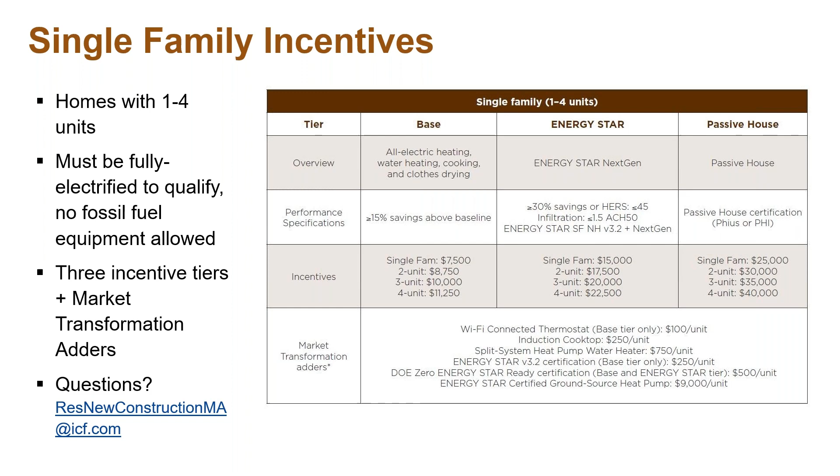Please note that the program defines low-rise buildings as having 3 stories or less, while high-rise buildings have 4 stories or more, or any multifamily building with centrally metered utilities for tenants.

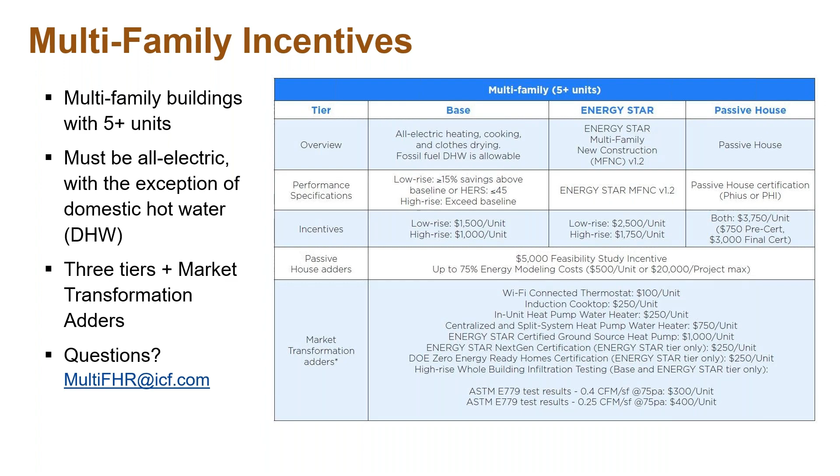Diving right into today's great presenters. First, we have Megan McDonough. She has been the Executive Director of Pioneer Valley Habitat for Humanity since 2014. Megan has been working with Habitat to refine the model of small ecological homeownership, asking the question, what's big enough to contain the dream of homeownership? Prior to her work with Habitat, Megan spent 7 years at the Center for Ecotechnology, providing support for green building certification programs like LEED for Homes and Energy Star Homes. She has a master's degree in regional planning from UMass Amherst.

Next, we have Walt Kohler. Walt is a volunteer who has been building homes with Pioneer Valley Habitat for Humanity for 17 years. He got involved with Pioneer Valley Habitat on the construction site when he retired from the tech industry and has helped to build more than 20 homes. Over the years, he has increased his depth of knowledge in building knowledge and applied his project management skills as a volunteer build team leader, doing planning and project management for Pioneer Valley Habitat construction projects.

Last but not least, we have Jamie Callan. He is the owner of Riverbend Design LLC, and he is a certified HERS rater since 2013. Jamie's background as a carpenter and general contractor led him into the building performance field and sparked an interest in high performance homes. Through many years of participation on building projects as a contractor, rater, and consultant, Jamie has developed a focus on making high performance building practical for all tradespeople with commonly available materials.

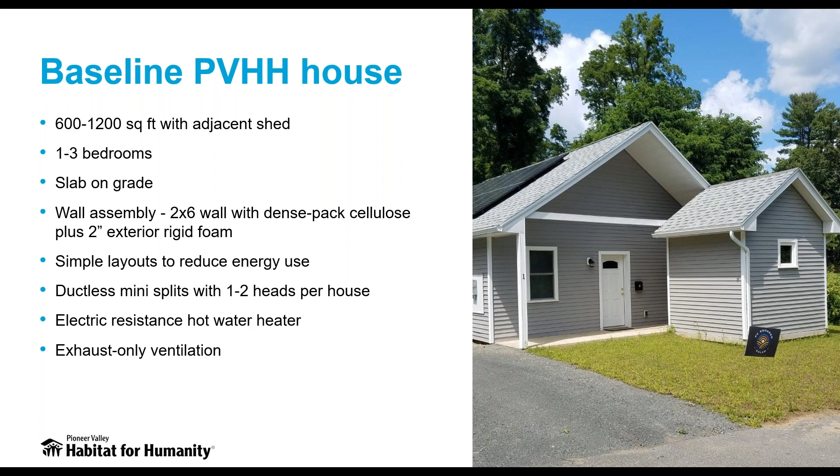So if you go to the next slide, when we decided to try and get to this level 2 incentive, that $25,000 for a single family house for going all electric, some of the general requirements we were already aligned with. We were already doing mostly all electric homes. We don't have natural gas availability in Western Mass, so all electric makes a lot of sense.

But some of the challenges we have faced are around the overall building air tightness, getting our ACH 50 number on the blower door test down to less than 1 is definitely a challenge. And we also have to get the overall HERS rating for the house to be less than 35 without the addition of PV. So that means looking at the overall efficiency of the house as a system.

That meant us going to heat pump water heaters. It was really a necessary step for us to get that overall efficiency of the house. But since we're building slab on grade houses, finding a location for that heat pump water heater is a little bit more difficult. Typically, you throw it in a basement, no problem, but we didn't have a basement in these houses.

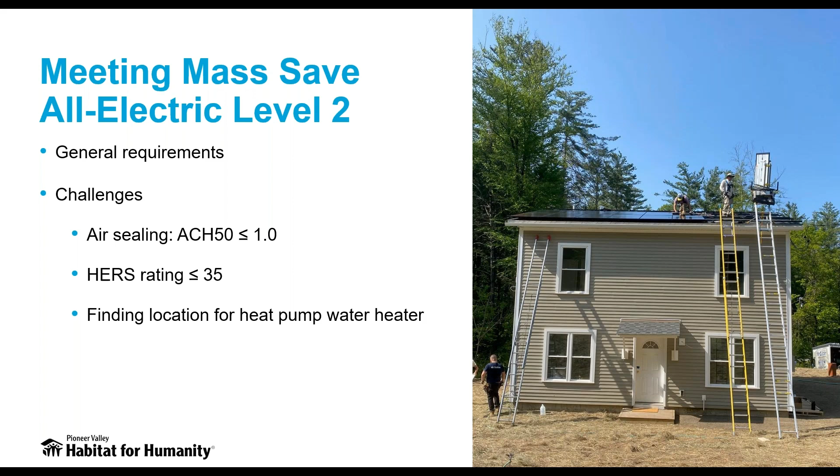Next slide. This is a little bit of a history of houses we've been building in the last few years. And you can see the rows in green, these houses are ranging from 600 and something square feet to about 1,400 square feet. Our HERS ratings without PV, I think were pretty impressive, 51 at the highest and down to 34.

With PV added, we got as low as a -19. And these are some great numbers, but trying to get to that HERS 35, you can see we only did it on a couple of these houses.

And the one highlighted in blue is the house we're going to talk about the most today, this house we built in Conway. We were able to hit that overall HERS target, as well as the ACH 50, which is that measure of building air tightness that they do with the blower door. We got that one down to a 0.95 when the program for level 2 requires a 1 ACH 50 or lower for that highest incentive.

And we didn't quite make it with our other houses. We were trying in 2023 with those 3 houses we did in Northampton to make the incentive. We did make it to the $15,000 level 1 incentive with one of the homes that got under a 1.5 ACH 50, but we didn't quite get there with the others.

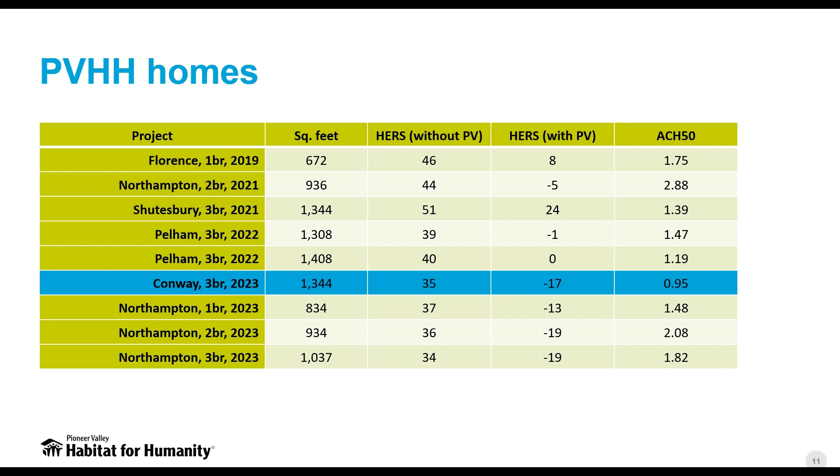Next slide. So I think I'm going to turn it over now to you, Walt, here to talk a little bit about the house we built in Conway and where we went from here.

Okay, thank you, Megan. So the house shown on the right in a rendering is a 2-story, 3-bedroom, 1.5 bath house, slab on grade. Our goals were energy efficiency, healthy indoor environment, low maintenance, and simple to build. As Pioneer Valley Habitat, we do most of the building with volunteers, some of whom are skilled, some of whom are not too skilled, but learning skills. And of course, we have to engage with professionals for the site work, for the foundations, for the plumbing and things like that.

But most of it is done, most of the real building and the challenges to get to the ACH 50 under one are up to the volunteers. The next slide, please.

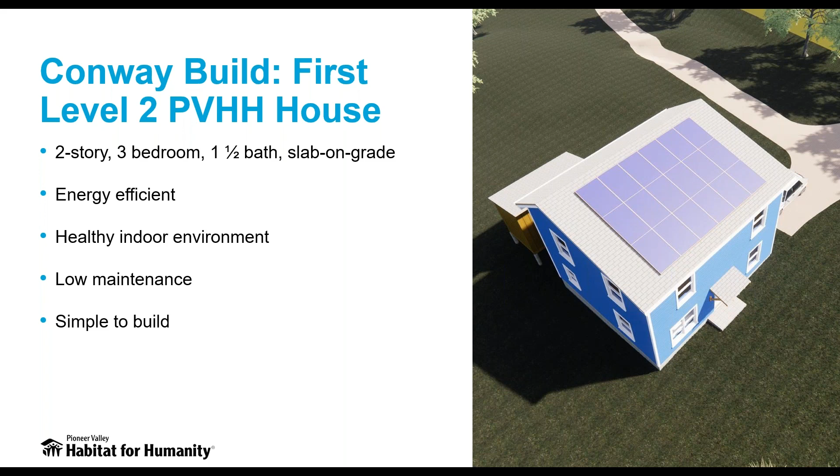So here I say are the keys to reaching level 2. It's the insulation, and so as Megan said, we've been building 2x6 walls with exterior insulation or dense packed cellulose on the interior and 2 inches of XPS on the exterior. This shows a picture on the right of our house with the rigid foam on the exterior and zip taped the joints and zip taped around the windows. That's basically our vapor barrier, for the water and vapor.

Air sealing is critical to get to level 2, and I'm going to go into some detail on that. To reach level 2, we had to have an efficient heat pump hot water heater, efficient mini split for cooling. We found that in order to reach the air sealing requirement, it was very critical to do a pre-insulation blower door test analysis so we could figure out what additional things were needed to get under 1. We required balanced ventilation. We did this on this particular house. Without PV, we got down to 35, and with PV down to -17, and our ACH 50 came down to 0.95.

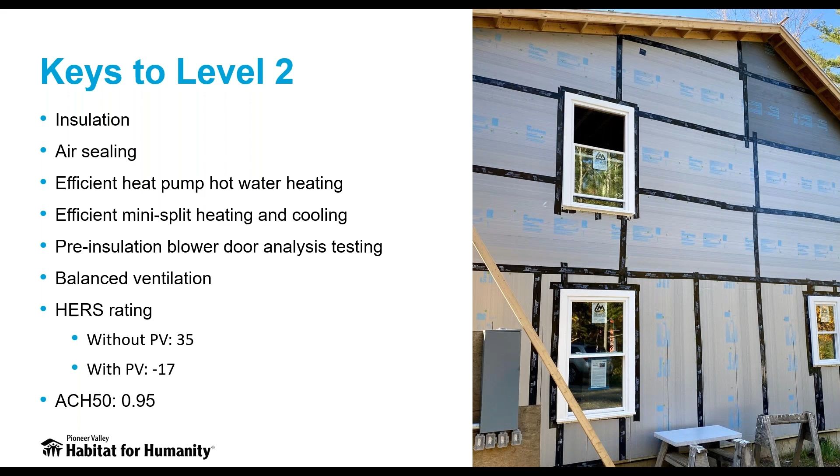We're going to go into a little more detail about the air sealing components. Again, it's a slab on grade. We use 6 mil poly under the slab for the vapor barrier. We build 2x6 walls with a PT base plate, and we sealed and caulked the PT to the base plate. We have OSB sheathing on the house, not zip sheathing - this was a little less expensive. We caulk all the OSB sheathing joints to the framing. As a backup, we also zip tape the OSB sheathing seams, and we zip tape the sheathing around the windows and the door rough openings.

When we put the windows in, we foam seal the windows and doors to the rough openings. The picture on the right shows a volunteer doing the foam air sealing of the windows to the openings. The joint for the air sealing is the sheathing.

The ceiling wall of our 2nd-story house - the ceiling is the air barrier. So we put a plywood wall cap on the top plate, and then we caulk the ceiling drywall to that cap. I'll show you in more detail in the next slide. We do a lot of caulking, a lot of air sealing.

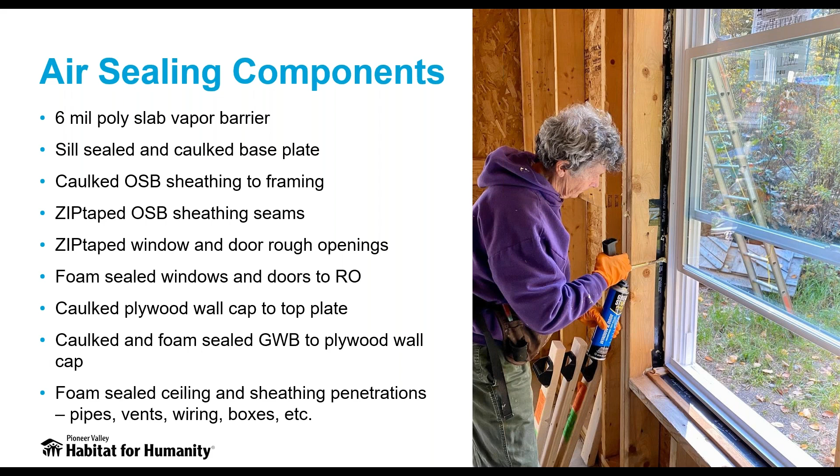Here is a wall section of the bottom of the house. At the very bottom, you see the foundation where we put 2 inches of EPS foam down below, and on top of that foam, we put a vapor barrier, and then the slab goes on top of the vapor barrier. That vapor barrier extends out beyond the foundation, out of the wall. On top of that vapor barrier, we put foam seal and caulk, and then put a PT base plate down on top of that to make that air seal. The yellow line going up shows the sheathing, and that's the air barrier to the house - that sheathing is the air barrier. At all points where we interface with the framing, we put a row of caulk there.

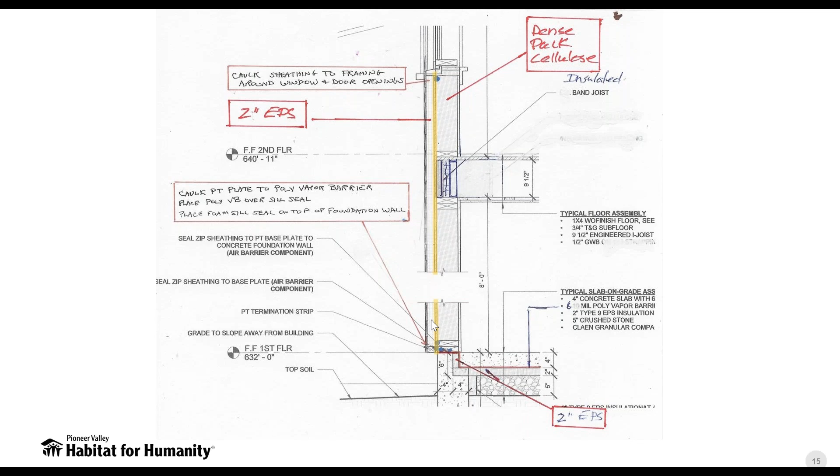The insulation in the house, as I said earlier, we have dense packed cellulose on the interior and 2 inches of EPS on the exterior. We get an R value of 30 doing it that way. Let's go to the next slide.

The next slide shows what happens at the top of the house, where we have to transition from the exterior sheathing as the air barrier to our ceiling drywall as the air barrier. All the little blue dots show where we apply caulk in order to seal the sheathing to the framing, and also to seal the interior drywall to this plywood top plate that we put on top of the two framing top plates.

So we use a lot of redundancy in terms of how to seal things up. We find the redundancy is important because we don't have professionals doing all of the work. We have volunteers, and sometimes they're very sensitive in terms of applying things, and sometimes they're not quite as good as we'd like, so we end up having to do redundancy. In addition to the caulk, after we did a blower door test, we found air leakage at the joint between the top drywall and that plywood top plate coming out of the wall. So we went around and put a row of expanding foam at that joint. Again, we use belts and suspenders here often in order to get the final result we're looking for.

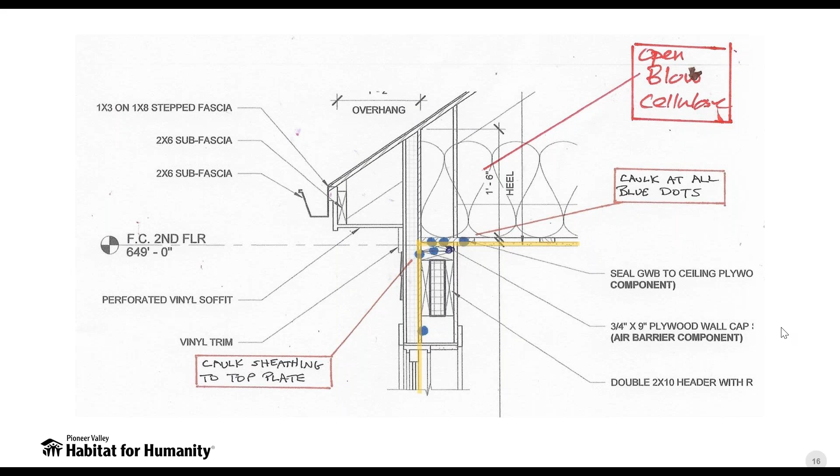In terms of energy efficiency and air quality, we've used the Broan ERV system to take out stale air and bring in fresh air. We take stale air out of the bathrooms, and one of the pictures on the lower left shows the unit in one of the bathrooms. The other picture of the exterior of the house shows the exterior intake and exhaust we use for that system.

Finding a place to actually put this ERV system is also a challenge in a small house, and we've placed it over the stairway going up the stairs. We'll show a picture of the layout in one of the next slides.

On the right-hand side, it shows the Mitsubishi mini splits, one of the heads that we have, and the double units on the outside. We have one Mitsubishi unit head downstairs and one upstairs.

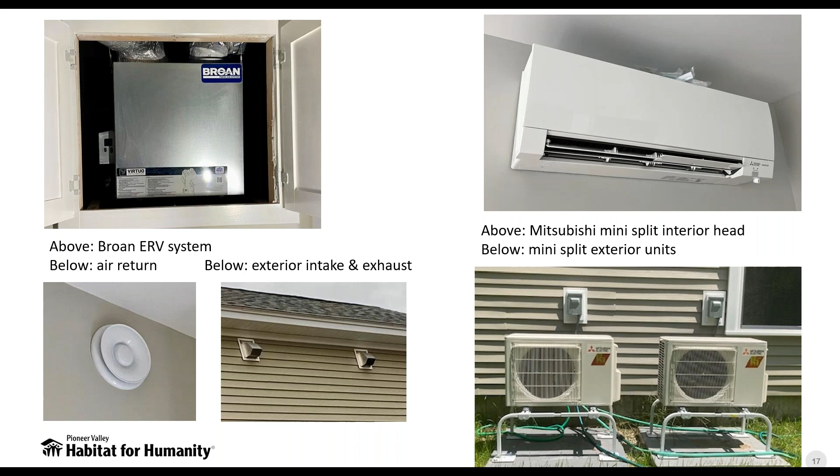As Megan was saying earlier, finding a place for the heat pump hot water heater was a challenge. This shows the heat pump hot water heater located inside a closet under the stairway. This is a Rheem heat pump hot water heater, I think it's got an efficiency of 3.8.

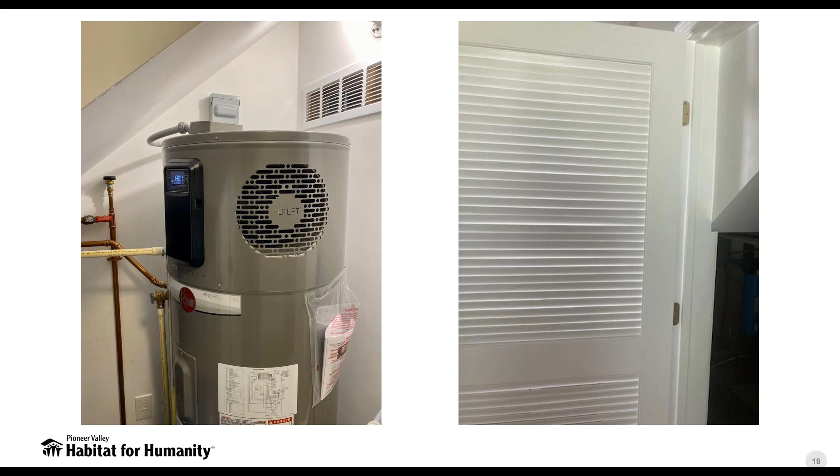The challenge is to get air into it, so you see we have a louver door on the right. We also have some louvers that go into the adjacent closet. Why don't we go to the next slide?

Here's a basic layout of the house, 24 by 28, this is the first floor. We have an accessible laundry and bath unit, and then you see the stairway, with the little yellow mark showing the DHW, where we put the hot water heater. The door labeled D2 is actually the louver door, where we get air to come in and exhaust into the adjacent entryway.

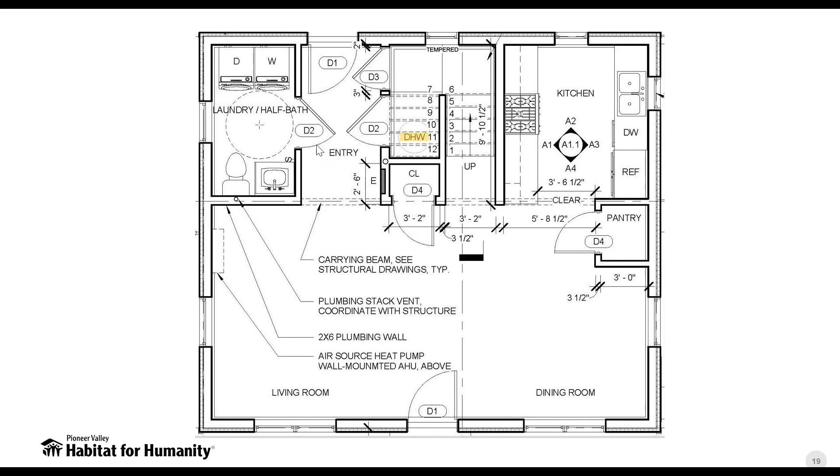On the left-hand side of the house, there's a marker that says the air source heat pump wall-mounted unit above. That's where we put the interior head that's going to heat and cool the whole first floor of the house. Let's go to the next slide.

This is the second floor. It shows 3 bedrooms, a bathroom, and a central hallway.

The key on this slide is we put the other head for our heating cooling system outside of the bathroom, there's a little arrow there. Unfortunately we didn't highlight it, there we go with the pointer. That's basically where the head is, and that heats and cools the second floor.

As Megan will discuss a little later, it's a challenge to get air distribution to all of the rooms. But we found that given good insulation, and if the homeowners keep their doors open most of the time, the variation seems reasonable, even without actual ducting going into the individual units.

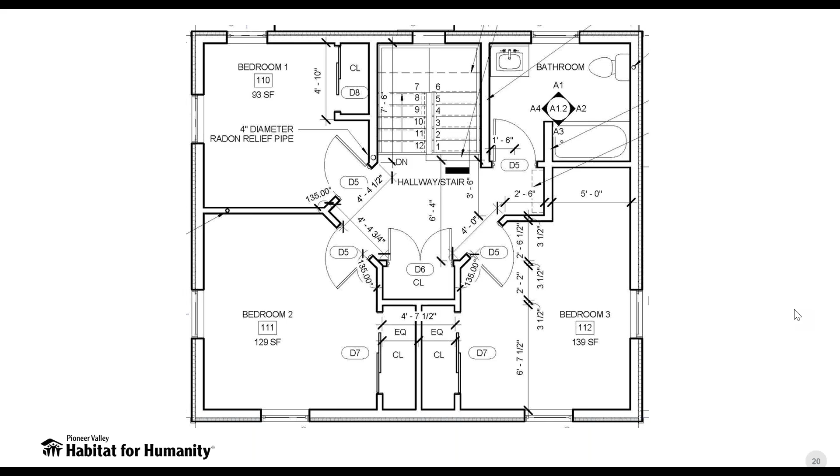Next slide. Okay, this is time for Jamie to take over.

Hi Walt, thank you. Let's see, mine's gonna be small here, but...

I think there's a few points which have already been touched on that I just want to reinforce, and one is the redundancy that is pretty much required when we're talking about air sealing details, especially for new or inexperienced builders. With the habitat projects, they have a rotating crew of volunteers, so you never really know who's going to be in charge, so that redundancy really was critical in their detailing.

And also having somebody, in this case Walt, really take the lead on several projects where he's been in charge of those details, and he's met me on site every time we do a blower door test. In this project, we did 3 tests.

One was at the pre-insulation stage. Framing was complete, windows and doors were installed, and they had installed drywall on the second floor ceiling below the attic, so the air barrier was complete. At that point, we were a little over, we weren't quite meeting the 1 ACH. I think we were at about 1.3 ACH 50.

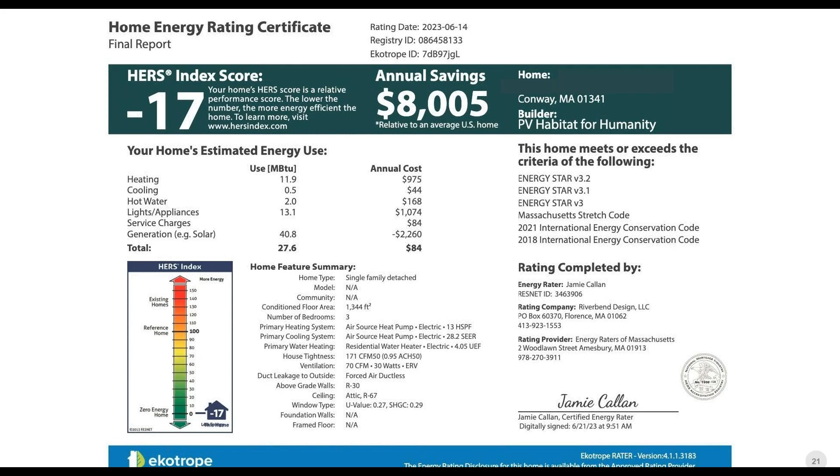Thanks, Jamie. We definitely needed your advice to get to those scores, so we appreciate that.

So at Pioneer Valley Habitat for Humanity, like I said, we build homes with volunteer labor and then sell them to low-income families. We have done some follow-up surveys with those homeowners to ask them about their satisfaction living in the homes. We did one in 2021 of our homeowners looking specifically at their mini splits, their satisfaction with those.

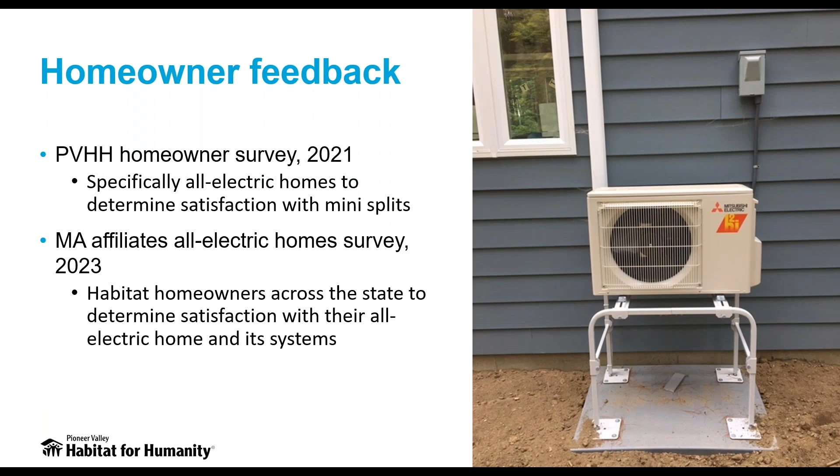And then we did another survey this past year, in collaboration with other Habitat for Humanity affiliates building all electric homes in Massachusetts. So let's go to the next slide and I can share some of what we've learned from those surveys.

So Pioneer Valley Habitat, we've been doing ductless mini splits with just 1 or 2 heads, depending on the layout of the house, the square footage, and whether it's 1 or 2 stories. One of the questions we asked was: are you able to heat your home to the temperature desired? Are you able to cool it as desired? And we correlated that with the set temps they self-reported.

This is obviously, if you look at the scale here, not a huge number of survey responses - not a scientific survey, but useful data. There were 2 people who said they were rarely or never able to heat their home as desired. One of them was trying to hit a higher set point above 73-74 degrees, and that certainly raised some questions for us.

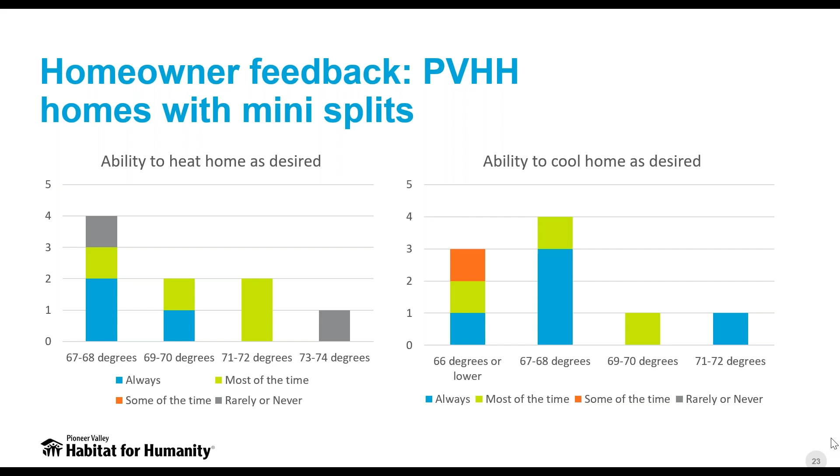On the cooling side, the distribution seemed adequate, and there was only one person who some of the time wasn't able to cool sufficiently with those single mini split heads, the 1 or 2.

And if you take a big step back, the overall satisfaction with heat distribution, not just temperature, is that about 2/3 were very satisfied or somewhat satisfied. And then there was about a third of people who said they were somewhat unsatisfied or very unsatisfied with the heating distribution when we did these mini splits with just the ductless mini splits.

But despite that, most respondents said they don't use any additional source of heat. And overall, the responses were more favorable towards cooling, being able to meet the desired temperatures.

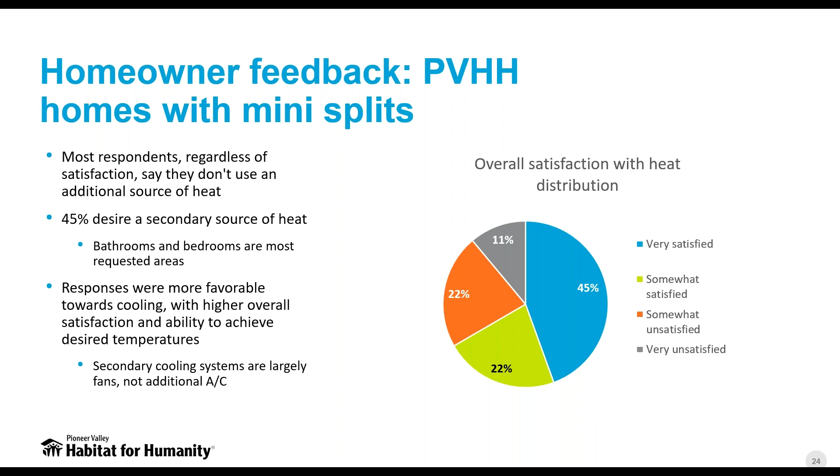The other question we were asking is, this dream of a zero net energy house, I think makes people think I won't have any electric bill. And in some cases that's true. We definitely have homeowners who are turning back the clock with their solar and the meters running backwards.

But we also have homeowners who have electric bills. In the chart, green are people who have solar and orange are people who live in all-electric homes without solar. So some obvious correlations: the higher bills tend to be with people who do not have solar, which is what we would expect. But there are still some people who have some solar panels, this doesn't say how many, that are still ending up spending over $900 a year on their electric bills.

So I think it's important that we set expectations about what it means to live in an all-electric home. Sometimes the fact that it's more than their last electric bill might be a surprise because they have all this energy efficiency, but they might not be also comparing their heating bill. So once you put your heating, your lights and appliances all onto one bill, you've got to make that comparison. The majority did say their energy bills were manageable or very manageable, at 81%.

We asked them about, are you on a budget plan with the utility company? Did you learn about your estimates for how much energy you would use? Do you enroll in the lower cost electricity program that's out there for low income families? So we wanted to find out if people are aware of some of those resources from the utility company and how education might prepare them for what to expect with living in an all-electric home.

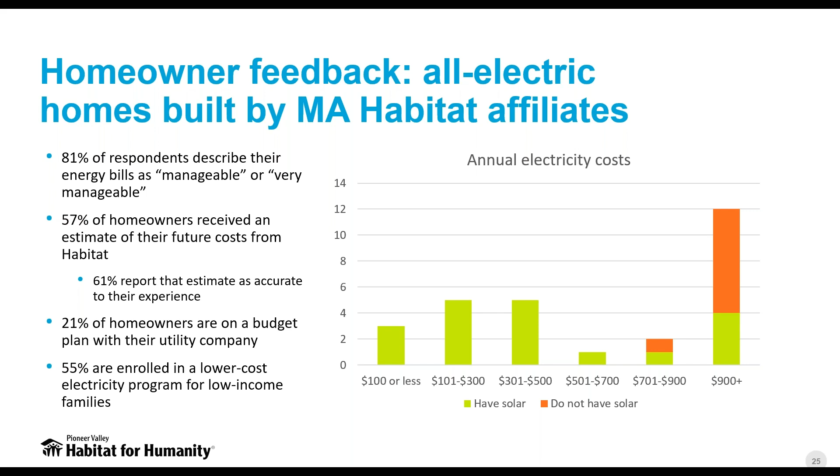Next slide. One of the things that can be really hard is when someone moves into a house.

Because a house's solar panels generate more in the summertime when the days are longer and the sun is up higher in the sky, this yellow line on the chart shows the solar production, and those are the summer months in the middle, and then it goes down significantly in December and January. The blue line is electric kilowatt hour usage, a modeled usage. And you can see the expectation is that they're going to use a lot more electricity in those winter months when they're not generating as much solar.

So if you move into a house in, say, the fall, in October or November, while your solar generation is plummeting and your usage is going up for the winter, you won't have banked that solar energy from the summer for your net metering credits. So that can be especially difficult that very first year, not having as much solar energy banked for the electric bill. It's all about setting expectations. Next slide.

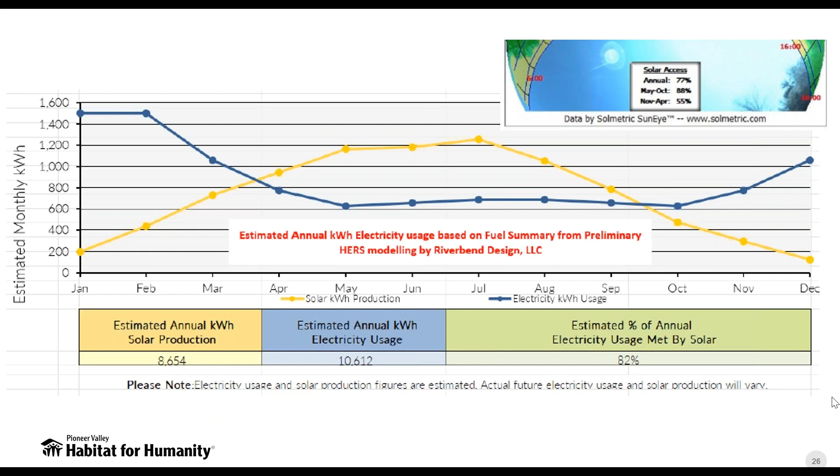So, thinking about our overall lessons learned from these projects, working with our HERS rater to do a pre-insulation blower door test was really critical to knowing if we were on target for our air sealing. Putting up continuous ceiling sheetrock before the interior framing is one of the things we did to make sure that envelope was really complete, and so we could do that pre-insulation blower door test.

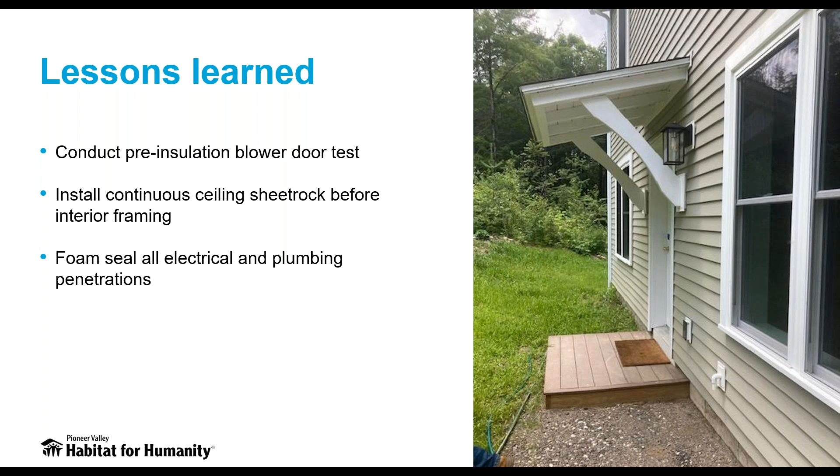Foam sealing all the electrical and plumbing penetrations, just that attention to detail and redundancy that Jamie and Walt both talked about. Those all kind of have to do with that air sealing number, which was one of the challenges. Next slide.

Also, our challenges: the water heating location. It was challenging without a basement. There is some localized cooling that happens around an air source heat pump hot water heater like that, and it also makes noise.

In this house in Conway, we used—Walt told you what brand, I forget now—but we're also looking at some newer models from A.O. Smith that said they had 45 dB instead of around 65 dB, which is what we're measuring. So looking at the noisiness of this equipment if we're putting it inside a living space, what's the duct layout for our ERVs and how does that contribute to noise in the living space?

And then this ongoing conversation around homeowner education: are you comfortable keeping your bedroom doors open so that mini split on the second floor can distribute heat to all the bedrooms? Do you understand what's a normal range of temperatures or what's a normal range of an electric bill in a house like this?

There are some things homeowners can do, like shorter showers, less hot water, but some of it is just about what expectation you have. Do you expect it to be within 1 or 2 degrees in every room of the house, or are you comfortable setting your thermostat in the living room at 72 and having it be 68 to 70 in some of the further rooms? So we think that's one of our other major lessons learned, that you have to work with your home buyers so they understand what it is they're buying.